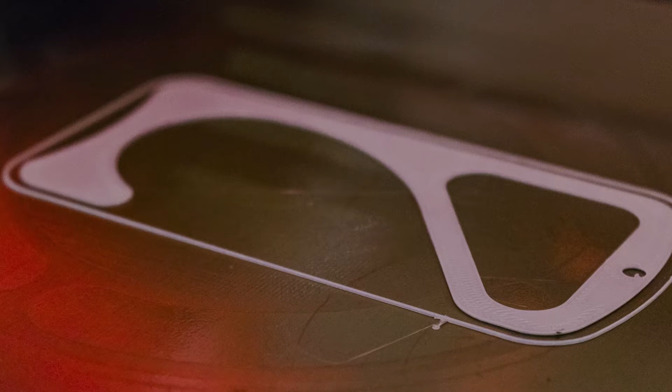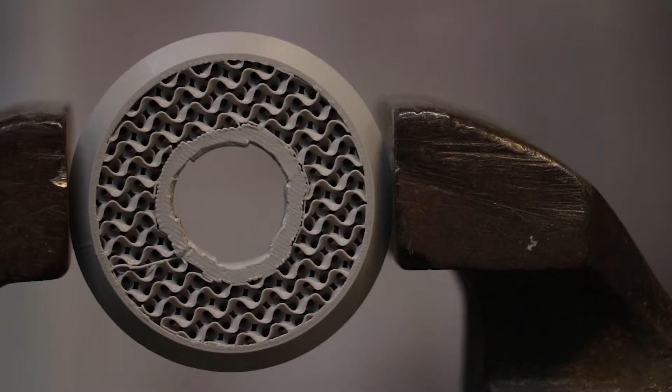Hi, my name is Corwin Ackerman with AK Studios Design, and today we're talking about designing sourced components into your 3D printed prototypes. Increasing your capabilities, durabilities, and functionality of 3D printed prototypes helps you keep prototyping costs down and keep your prototyping time cycle shorter. So let's get into it.

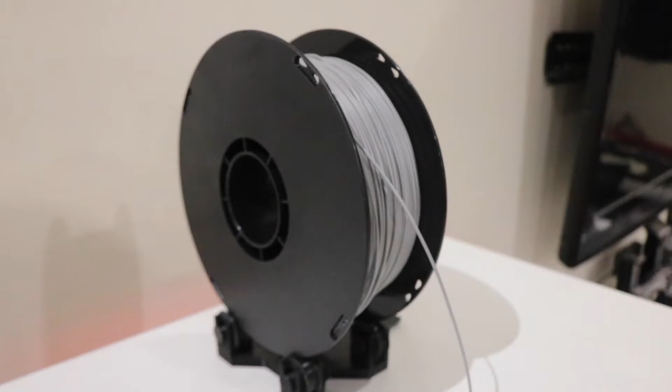So we had some issues with this spool holder. It's just too much friction and it would cause the prints to come out shoddy. This could definitely be fixed by just moving this spool holder forward or sanding these plastic wheels, but for the sake of this video, we're going to design something entirely different.

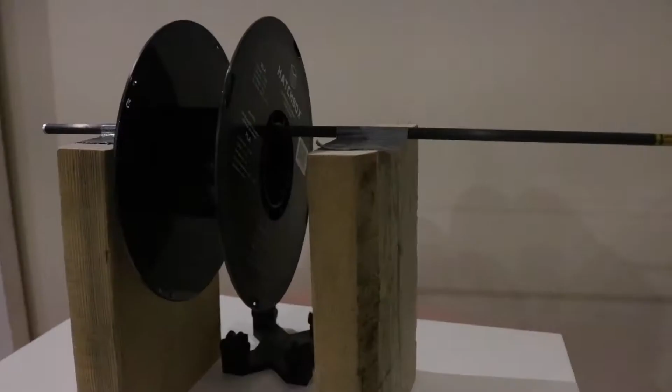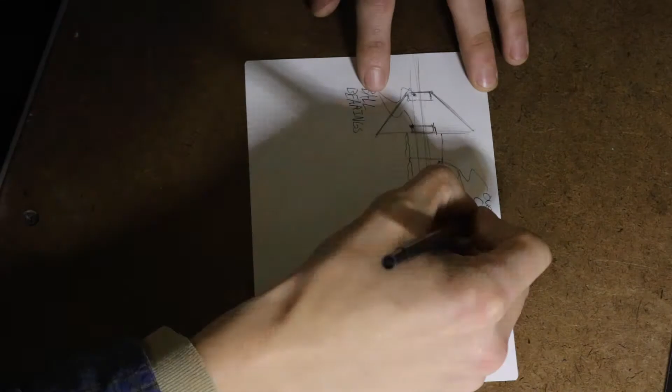You can see I just put together a little mock-up to see what it would look like in physical space at the height I was thinking, took some measurements of some spools, and laid down some initial thoughts on paper before moving into CAD. And now we print.

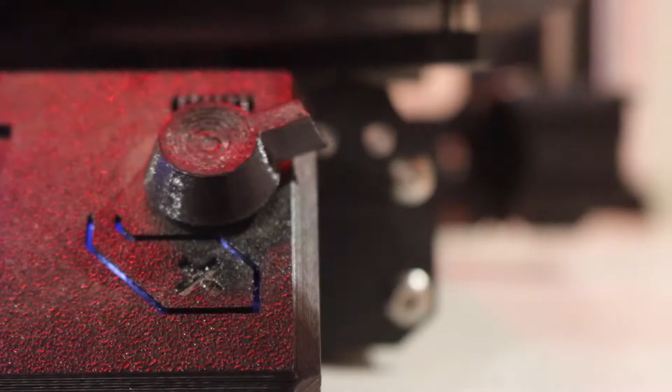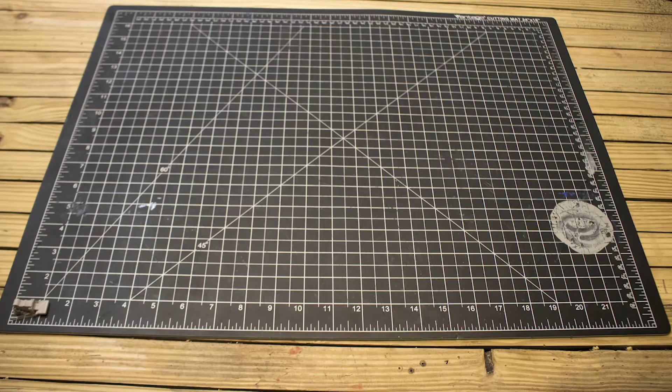So here are all the parts we're going to be using to put this spool holder together. A lot of printed parts using PLA and flexible filaments, some used bearings we had laying around, as well as a carbon fiber shaft, some stainless steel pins, stock steel, and a little West System epoxy.

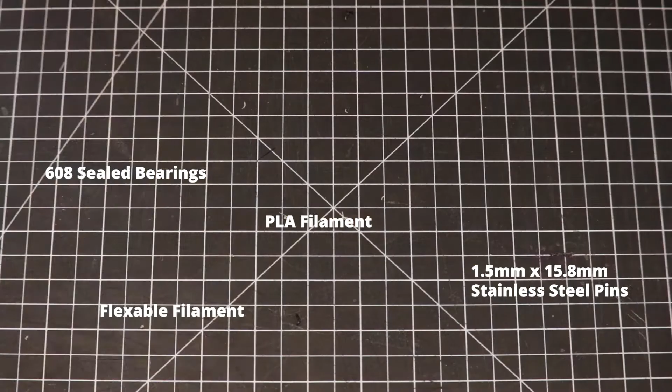So we'll start out with the bases themselves. These things might not look like much, but they actually have pieces of steel and epoxy cast in and around them, which really strengthens the rigidity of these parts.

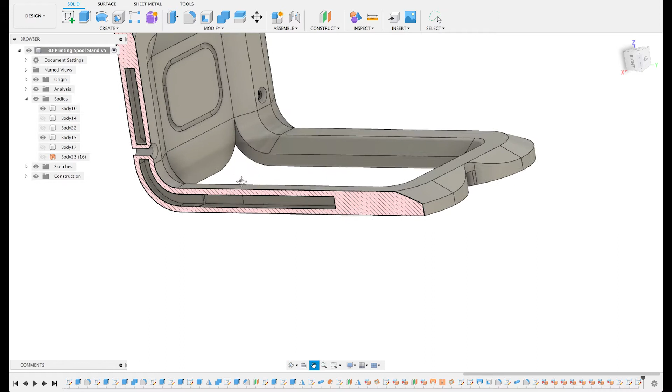So you can see in CAD, all we've done to make this possible is create a cavity that allows the steel a place to sit with a little tolerance to allow the epoxy to wrap around that steel, just like setting a post into a concrete footing.

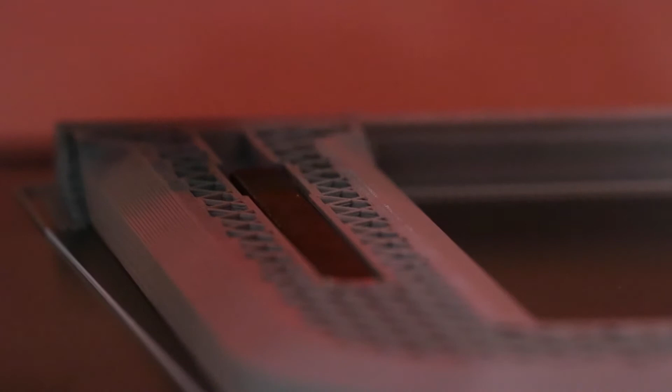Then in our slicer software, we tell it to pause once to put in the steel and at another level to allow us to pour the epoxy in.

One tip when you're using epoxy with 3D printed parts is to make sure you clean up any spillage. On one of the stands, I didn't clean up so well and we got a little separation on the stand. A really easy thing to fix with some CA glue, but it's worth taking note of.

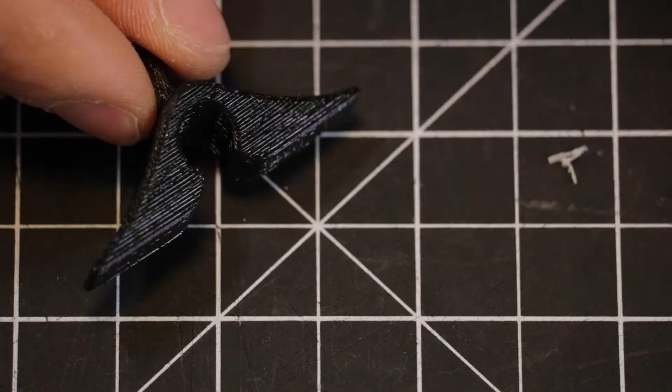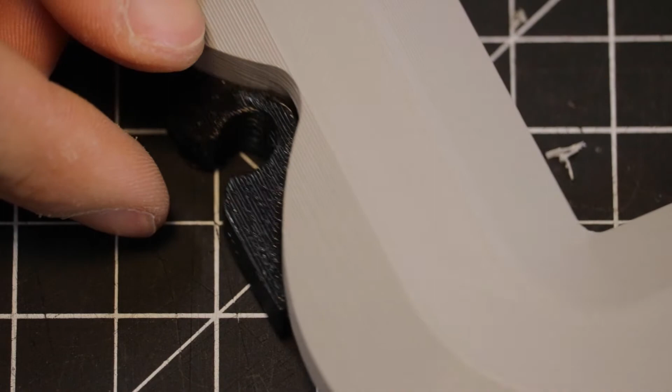Using different filaments, like this flexible filament for the part that grabs onto the carbon fiber shaft, help you push your boundaries just like sourced components do, and it's worth investigating if you've never used different materials before.

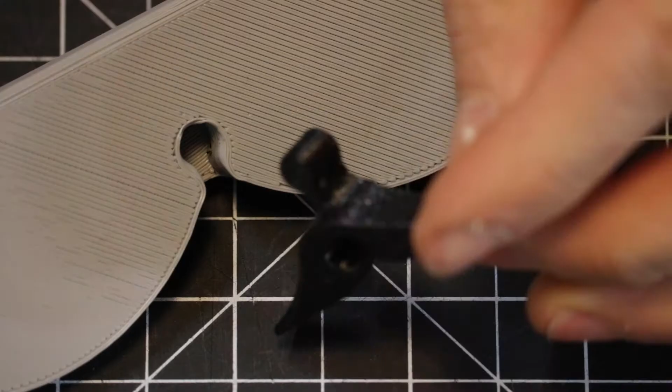And the reason we get such a nice fit here is we've just allowed a tolerance for these parts to fit together. And every printer is going to be a little bit different. This is why it's really important to keep a notebook and keep notes on all your prints, what your tolerances were, different materials in different situations.

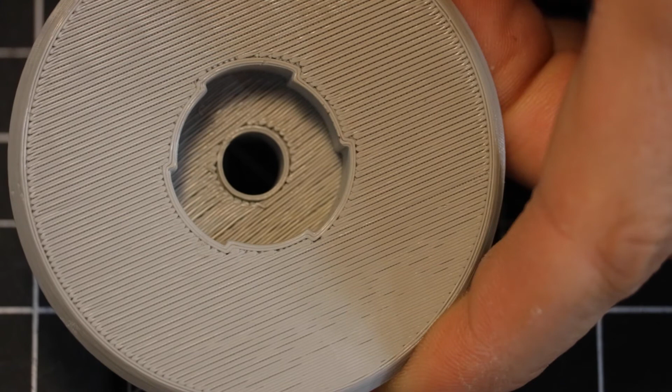That'll allow you to make better decisions moving forward and make less mistakes as time goes on. Another tip to increase your allowable margin of error is to decrease the amount of surface area or contact points between your precision sourced components and your 3D printed parts, which are always going to have some degree of dimensional inaccuracy.

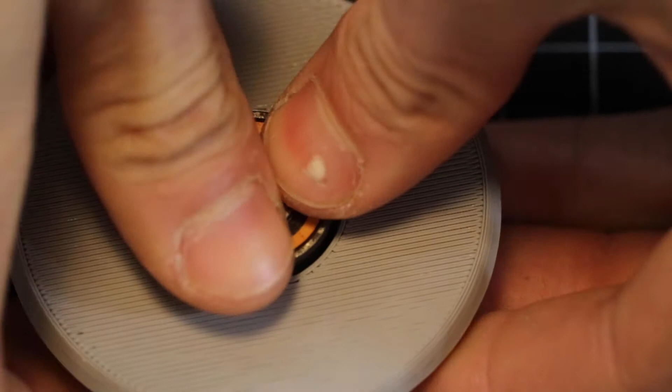Because we design sourced components into our prototypes quite often and we have a good understanding of what our printer's tolerances are, we ended up getting a really nice fit on the first shot.

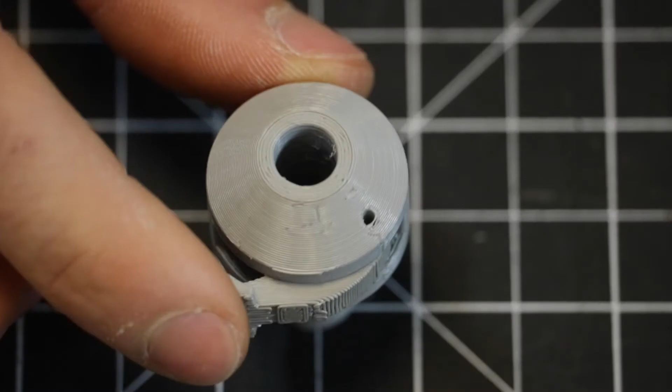And these are the stainless steel pins that are going to be acting as hinges in these little clamps that slide onto the carbon fiber rod and hold everything together.

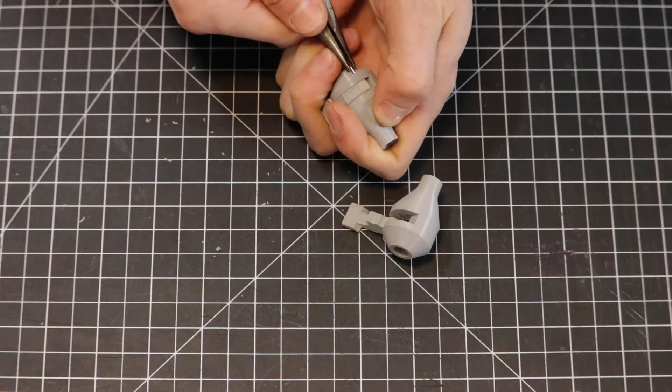So the real advantage of using source components shines when you're doing things that are really small. A part like this would normally break if I were to use a snap fit hinge or a little extrusion from the plastic sticking out.

And we'll take a quick look in CAD seeing how everything lines up. But like I mentioned before, you can already probably see some issues with this design, and feel free to download the files in the description below and make your own tweaks. We'd love to see them.

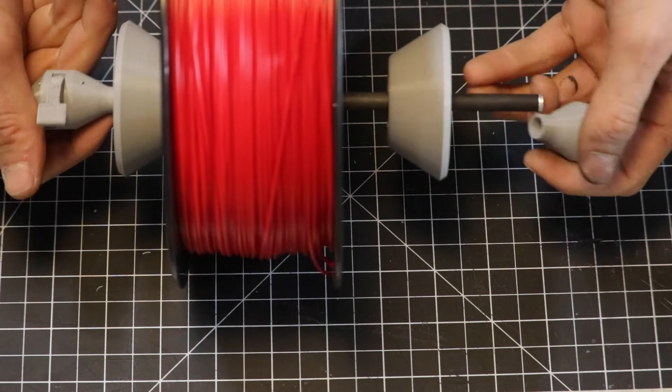And now we're just putting a quick assembly together on the benchtop before we bring it over to the printer. And now it's time to install and see how it works.

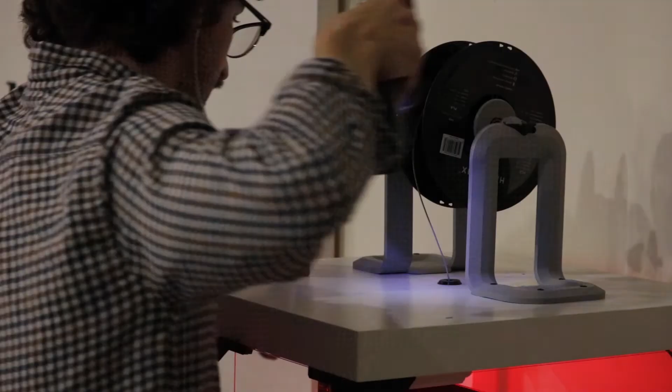I hope this video has been helpful and maybe you've learned a few things about designing some source components into your 3D printed prototypes. Designing source components into prototypes is one of a few things we do at AK Studios to push the capabilities and functionalities of our prototypes.

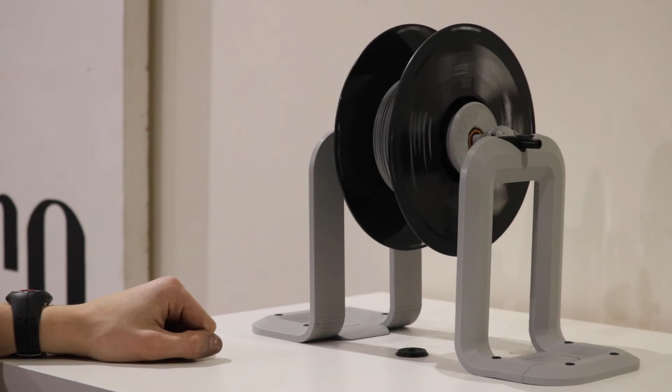And you can see this design is a big improvement over our last spool holder.